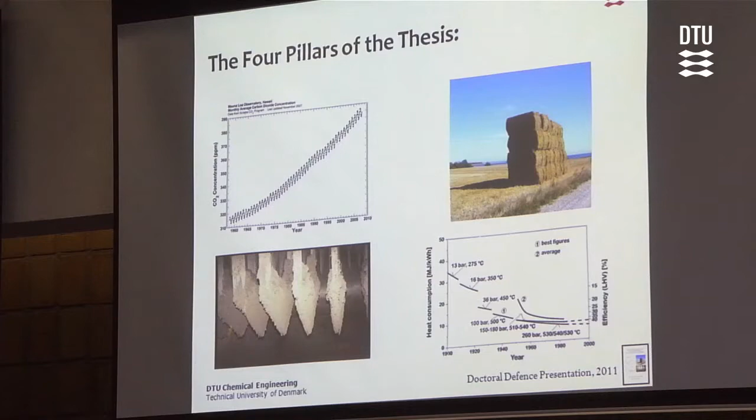We have to do something about that, so people have started firing biomass in this country, straw for the most part. The problem with the straw is that there is a risk of forming deposits on superheater tubes, and this will cause a low electrical efficiency, so we have to do something in order to solve that problem and increase the electrical efficiency of this.

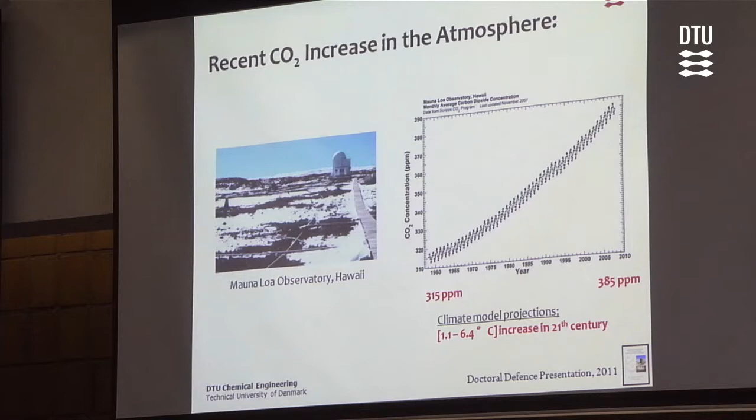As I said, the CO2 level in the atmosphere has increased over the last 50 years from about 315 ppm to 385 ppm. As a consequence of this, there are different numbers of climate models that predict an increase in the temperature somewhere between 1.1 and 6.4 degrees centigrade over the 21st century.

Now this has some consequences, one of them being that this beautiful creature will end up like this. We don't want that to happen for sure, but of course there are also other more serious problems with this. Rising sea levels, I mean, if you live in South Florida, you should be aware of this. There are potential problems with increase in the intensity of extreme weather events. We have probably already seen some of these things here.

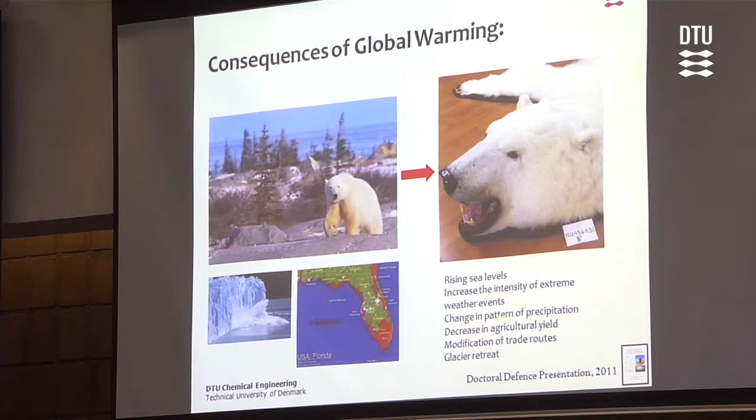There are probably some changes in the pattern of precipitation. There may be a decrease in the agricultural yield as a consequence of this. There may be modification of trade routes, and then we have seen already some significant glacier retreats going on. So we have to do something about this CO2 level in the atmosphere.

What can we do? If we look upon the carbon cycles of different fuels, over here we have the biomass. The time from the point where we emit a certain amount of CO2 from biomass combustion and until that CO2 is recaptured is in the order of years, maybe down to a single year.

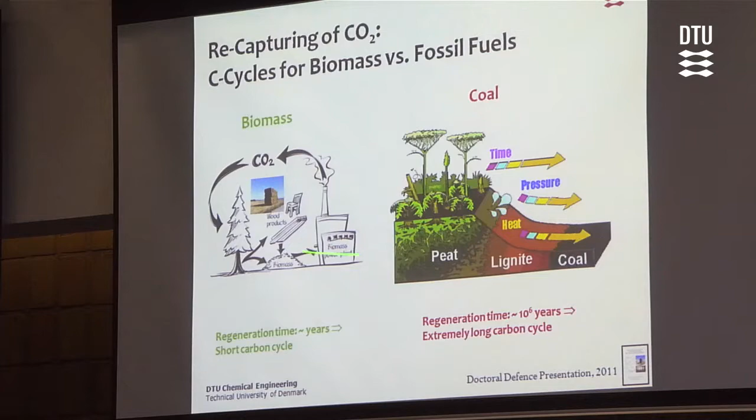If we take the same situation for coal, the time from the point where some plant material captures some CO2 and until you have a coal seam, this is done under the influence of pressure and heat over a very long time, up to millions of years. So the recapturing time and the regeneration time for coal is a lot longer than it is for biomass, and this is the reason why somebody came up with the idea that we can decrease the level of CO2 by burning biomass.

Everything comes at a price, thereby also the combustion of biomass. Here I have shown a Van Krevelen diagram which shows the content of hydrogen and oxygen versus carbon in different fuels. In here we have the old fuels, the fossil fuels. They have a low content of oxygen and hydrogen, but out here we have the biomasses. These fuels have a high content of oxygen and a high content of hydrogen.

Some of the oxygen is present as carboxylic acid groups, which have a counter ion, typically either potassium, sodium, calcium, or maybe even magnesium. And these counter ions have a tendency of leaving the system. They are released to the gas phase during combustion.

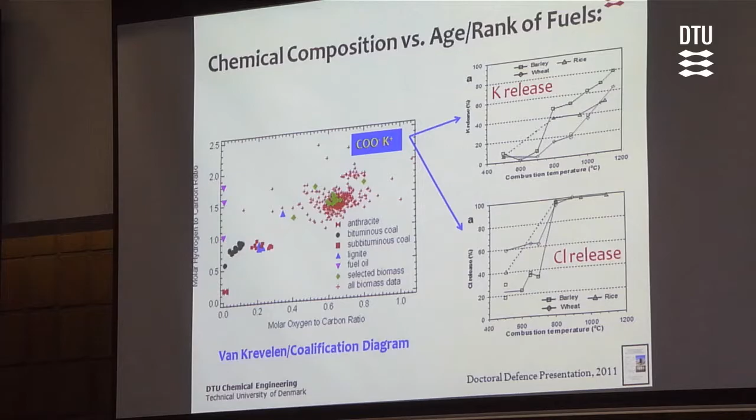In this case, you can see release profiles for a number of different annual biomasses for potassium, and you can see that at the highest temperature we have a release of somewhere between 60 to 80% of the potassium. For the chlorine, all the chlorine is basically leaving the fuel during combustion. So we have a bad cocktail here, a combination of potassium and chlorine.

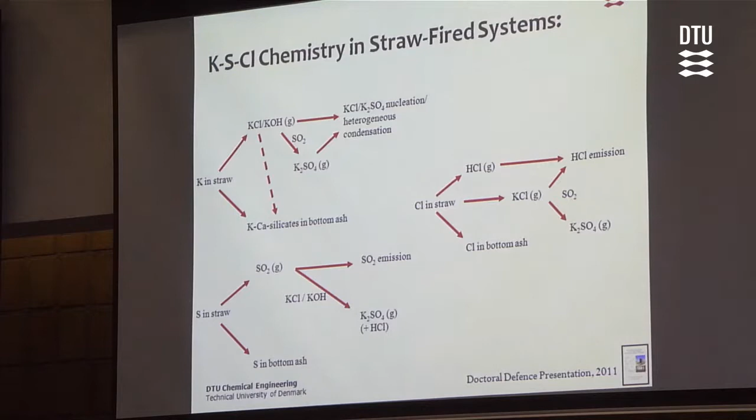There's a lot of chemistry going on in these systems when we burn the biomass. All kinds of interactions between potassium, chlorine, and sulfur leading to SO2 levels and HCl levels in the gas. And another important thing, formation of aerosols, small particles in the system. I'm sure we will have a discussion about this later on when we start the questioning part of this.

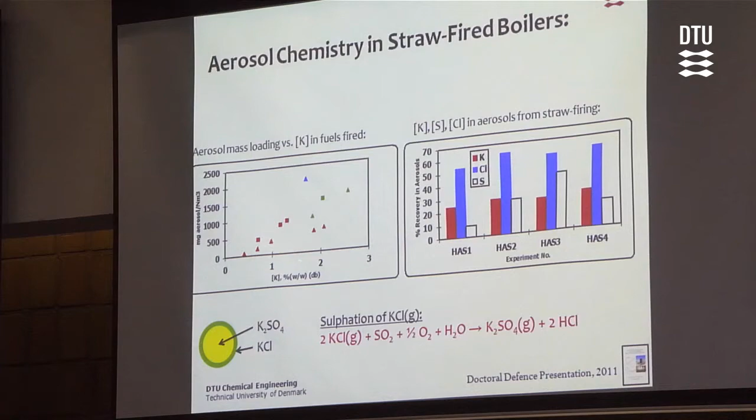Here is some data from one of the measuring campaigns where you can see the mass loading of aerosols in a flue gas versus the concentration of potassium in the ingoing fuel, the ingoing straw material, and you can see that there is kind of a straight line between those two. Somebody's picked up these aerosols and had them analyzed chemically, and you can see that a lot of the material in these aerosols is actually either potassium, chlorine, and sulfur.

Based on this, we had an aerosol technology group at the department some time ago that came up with this idea that the sulfation of KCl in the gas phase to potassium sulfate leads to formation of aerosols. And we will have a discussion about that later on also, I'm sure.

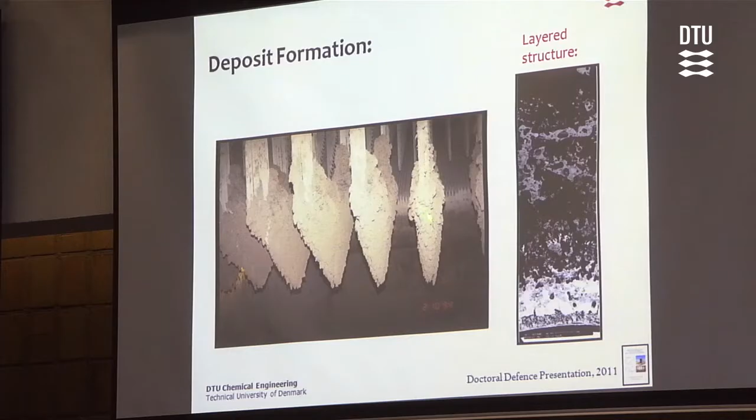The problem with the combination of potassium and chlorine is that it causes deposition in these boilers. And if you have a closer look at the structure of those deposits, you will see that in the inner layer you have a very high concentration of potassium chloride. This is a bad situation for the material that these tubes are made of. It can cause corrosion.

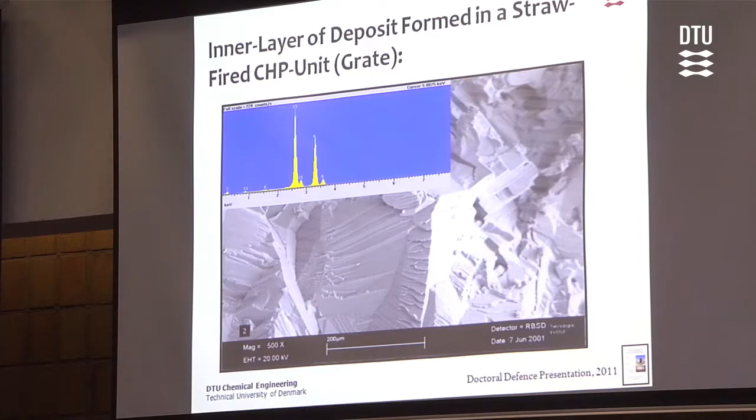I have another image here. This is an inner layer of one of the straw-fired plants we have here in Denmark. You see this inner layer, the only thing I find when I analyze it is potassium and chlorine. So we have analytically pure potassium chloride in the inner layer. What happens if you have an inner layer sitting on a tube which is rich in potassium chloride? Well, there's a risk of having a reaction with SO2 from the gas.

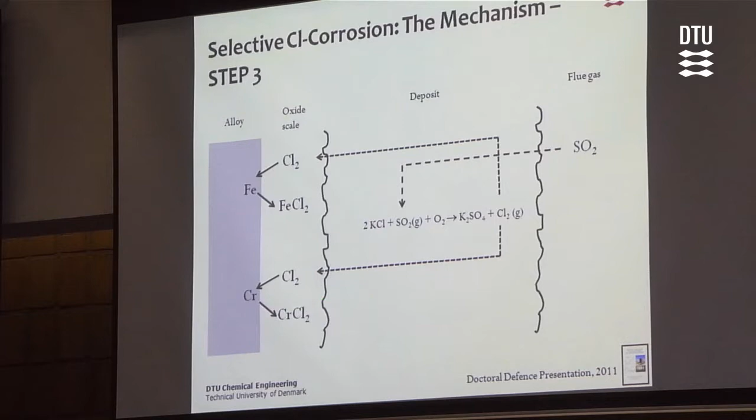This reaction may cause release of chlorine gas, which may penetrate through the oxide scale and react with either chromium or iron in the alloy material. This will form volatile chromium chloride or iron chloride, which will then move out through the oxide scale till it reaches an atmosphere with oxidizing conditions and be reoxidized to chromium oxide or iron oxide. So the presence of chlorine close to these superheater tubes causes some kind of an extraction of chromium and iron from these systems.

What can we do about this? There are a number of different means we can apply in order to minimize this effect. One of them is to apply an additive, and we've been working on that for a while actually in connection to this. In principle, we have two different types of additives. The first one here, the basic idea is that you inject an additive and you have some kind of unwanted compound removed from the gas by a chemical reaction on the surface.

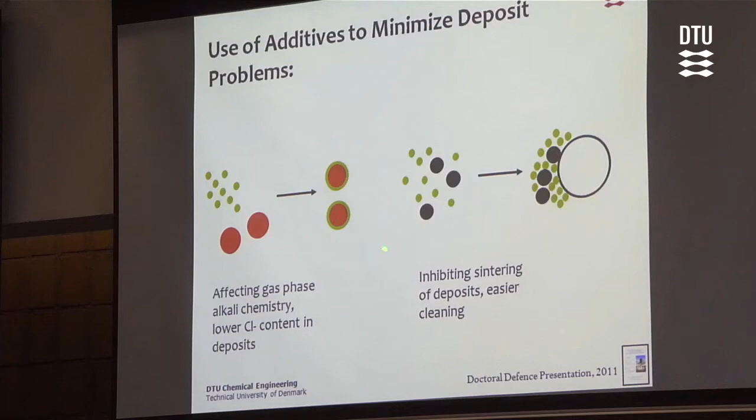The other type of additive, the black guys here, the idea is that you have them actually sit in the same spot as the rest of the material that is deposited on the tubes, but these cause inhibition of the sintering, which means that it's fairly easy to blow this off the tube. So we have in principle two different types of additives that we can apply. We have been working mostly with this one, where we have an interaction between some gas component transforming an unwanted gas component into something which is harmless in the system.

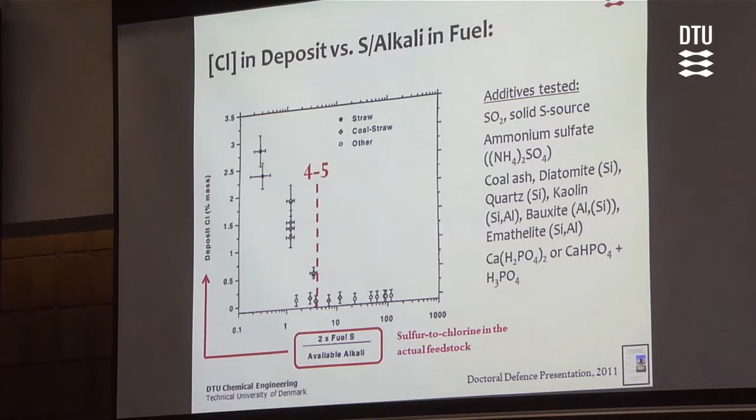Actually, if you look at the sulfur to chlorine ratio in the fuel, it's very important for the total amount of chlorine in the deposits. So if you have a high sulfur to chlorine ratio in the fuel, you have a low chlorine level in the deposits. So actually by adding some kind of a sulfur-based additive, you should be able to ensure a low concentration of chlorine in your deposits.

We tested some of these same additives as was tested in this full-scale plant in our entrained flow reactor, and saw that there's also an effect on the chlorine level in the deposits, at least when we see them in the entrained flow reactor. There's a lot of interesting chemistry going on with these additives, depending upon what type of additive we have. Is it aluminum silicon based? Is it phosphor based? Or is it sulfur based?

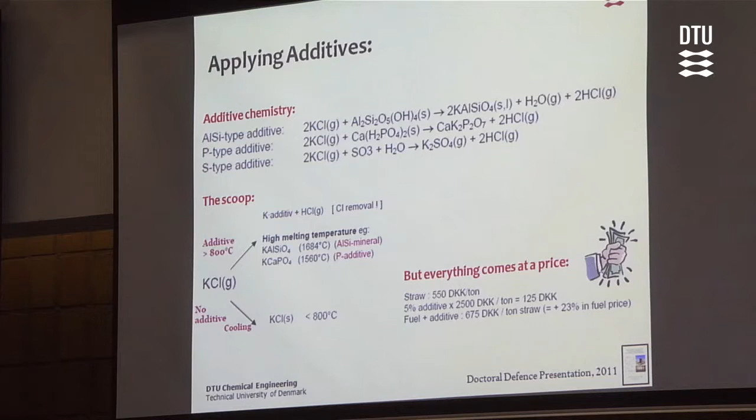The basic idea and the ideal additive would be one that removes an unwanted compound and transforms it into some high melting species that will not cause deposition. And then we have, for example, chlorine released as a lesser harmful species than was originally present in the system. But again, everything comes at a price, and adding an additive into the system can cost money, something you have to be aware of.

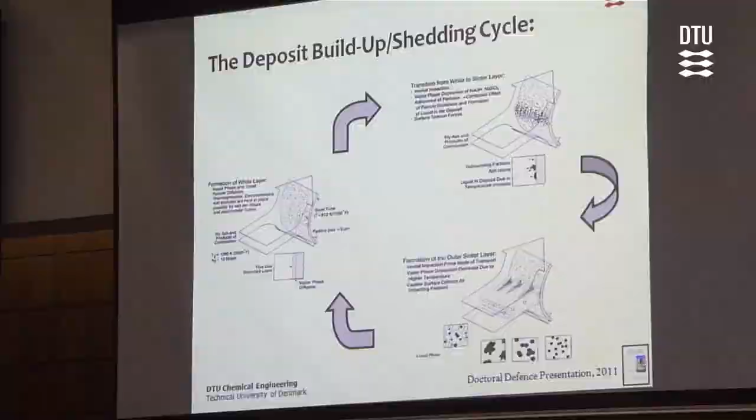Another angle of this work is the shedding work. We have been doing quite a lot of work on shedding actually. Shedding is the falling off of the pieces of deposits from a tube. If you look upon the deposition process, it's a cyclic process, meaning that first you build up a thin layer of something which makes the tube sticky. Then you have deposit of somewhat thicker layers of somewhat bigger particles.

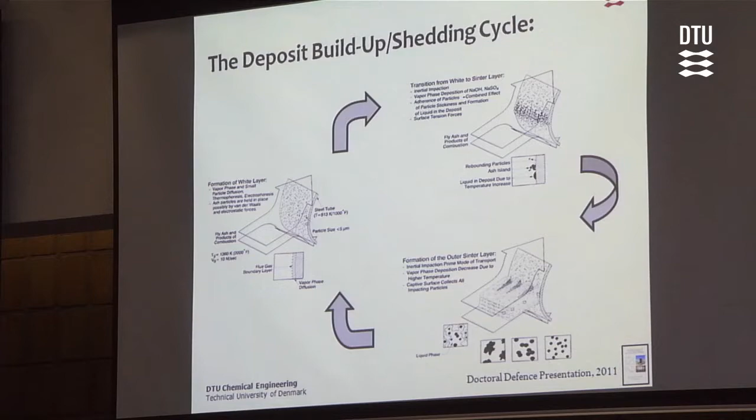And then at a certain point, you have an accelerated growth of deposits because the tube is getting wet on the surface and it becomes easier to retain the particles upon impact. So it's a cyclic process, which means that from time to time, you have some of the deposit that has built up on these tubes fall off. And then you build up a new layer.

So we started out by making a huge review of the literature where we collected all the available information. And then we developed a specially designed probe, where we are able to quantify the amount of deposit and the heat uptake at the same time, basically. So we can quantify how much heat is actually taken up and how much deposit is actually built up on this probe. We have tested the probe at Avedøre power station where we plugged it in and did some measurements, and you can see some of the raw data here.

You see the temperature profile, that's the gray one, and you see the mass of deposits being built up on the probe. You see it increases up to a certain point, then we have something fall off the probe, and we have a new build-up, and a fall off and a new build-up. This is raw data; if you average them over certain time periods, you can get signals like this, and you can then start analyzing how long is the deposition and how long is the shedding time for that actual system and that actual fuel.

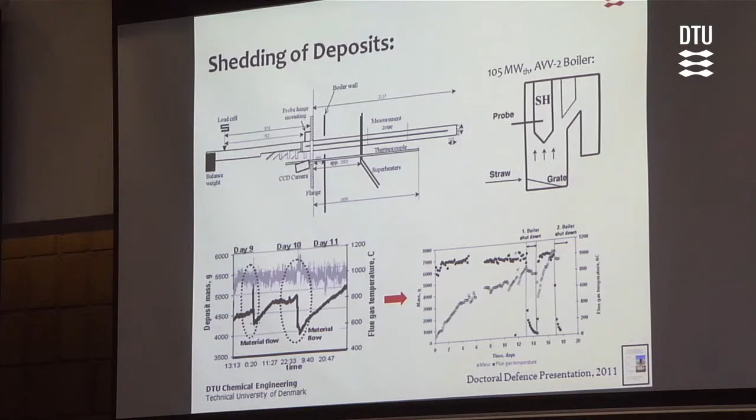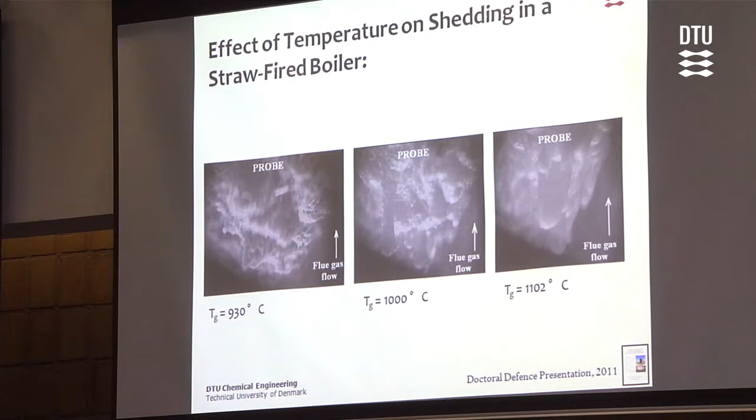Here is an example just to show you some images of what's going on there. Here you see the effect of the temperature on shedding in this system. We are looking in on a probe which is placed in the flue gas channel, and we are looking from below up against the south side of the probe. You see that at 930 we have an almost dry surface on the south side, which is coming in contact with the gas here. But if we increase the temperature, we start building up these droplets, and at 1100 we have seriously formed big droplets which are literally dripping off the probe. And this is what is happening.

Most of what I've been saying until now has been dealing with straw-fired systems. We have done a number of full-scale measuring campaigns of some of the straw-fired systems: Haslev, for example, Rudkøbing is another one, Masnedø power station, and Maribo-Sakskøbing. We have also been there doing measurements of different kinds. We have done two types of measurements, basically.

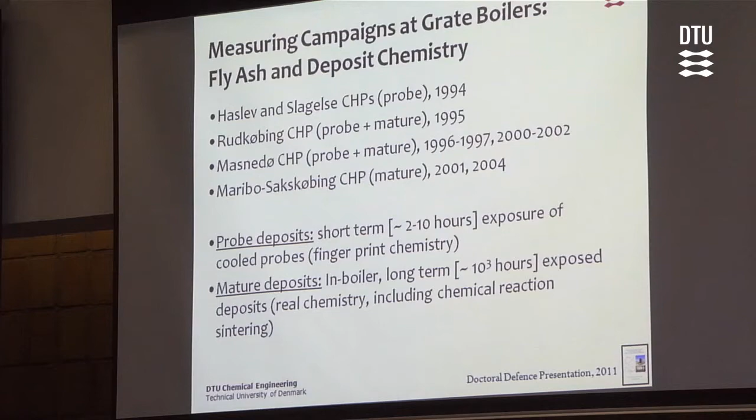Probe deposits, which is typically a cold finger that you stick into the flue gas channel. These probes have a very short exposure time, and it's sort of a fingerprint chemistry you get out of these probes. You get an immediate feeling of what is going on chemically in the boiler. We've also been analyzing mature deposits, in-boiler deposits, which have been taken out from tubes inside the boiler. And these deposits have typically been sitting for thousands of hours, so they have a more mature chemistry.

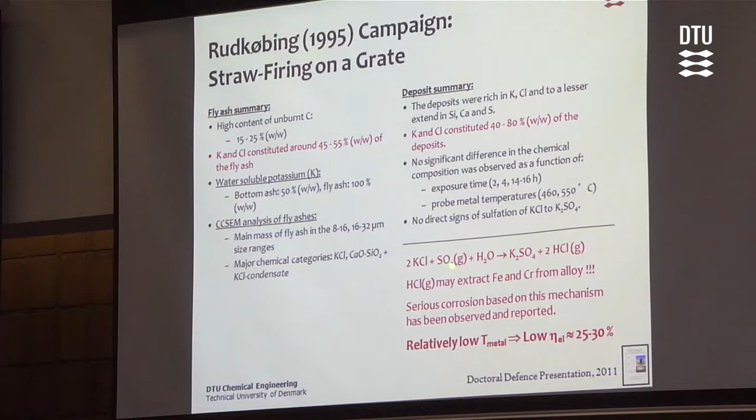One of the examples is the Rudkøbing power station, and the conclusion, if we look upon the fly ash chemistry: lots of potassium, lots of chlorine, and the same story goes for the deposit chemistry. The problem with the potassium and chlorine going together is that you may have this reaction with SO2 from the gas forming potassium sulfate and then releasing some chlorine gas close to the tube. And for that purpose, you have to keep the temperature fairly low in these plants in order to avoid serious corrosion. Therefore, you get a low electrical efficiency in these plants.

Somebody came up with a good idea here now. If we look upon the electrical efficiency of other types of plants, coal-fired plants, for example, you see that over the years, the electrical efficiency has improved significantly. And for some of the coal-fired plants, we are at electrical efficiencies of, say, 46 to 48%. So if we are able to sneak in a little amount of straw into these systems, we get a much more efficient transformation of the straw. And that is the basic idea.

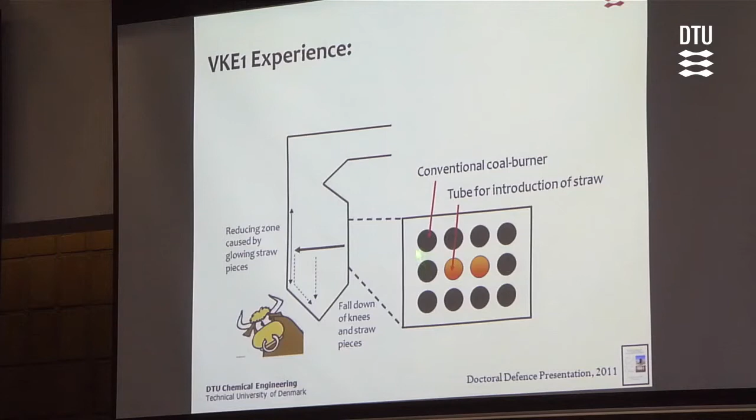So let me say a few words about the wonders of co-firing. This is an exciting world. First case was the Vestkraft power station in Esbjerg, where they blew in the straw in 2 tubes in the middle of the burner gallery. So those 2 tubes were surrounded by coal-fired burners. And I believe that they saw at least one negative consequence, which is that the straw was blown directly across the furnace and burned up all along the wall here. Or there was a drop of knees from the straw structure, which burned out in the hopper of the system. So it kind of indicated that you can burn straw, but it's not a very efficient way of doing it like this.

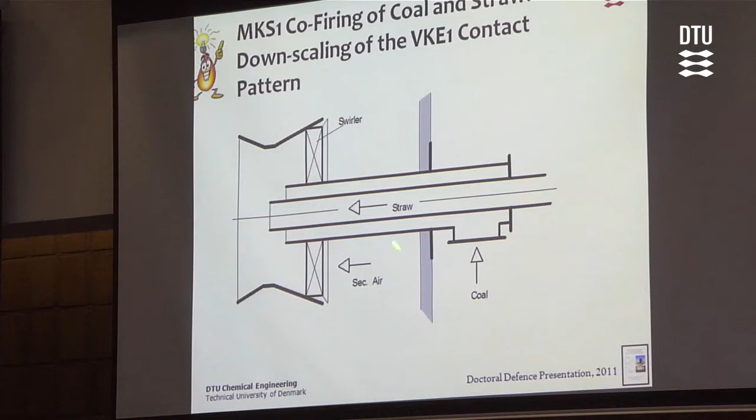But then somebody came up with this idea, let's downscale this system to a single burner instead of an entire burner gallery. So the next good idea, we now introduce the straw in the middle of a burner and have a swirling coal flame surrounding the straw, which gives you a very tight contact between the coal ash and the straw, which is releasing potassium and chlorine. The good story here and the big chemical scoop of co-firing is the fact that you take care of most of the potassium from the straw ash by use of the coal ash. The coal ash is, so to say, working as a sort of an additive here, taking care of most of the potassium, while most of the chlorine is leaving as HCl, which is harmless compared to the other situation.

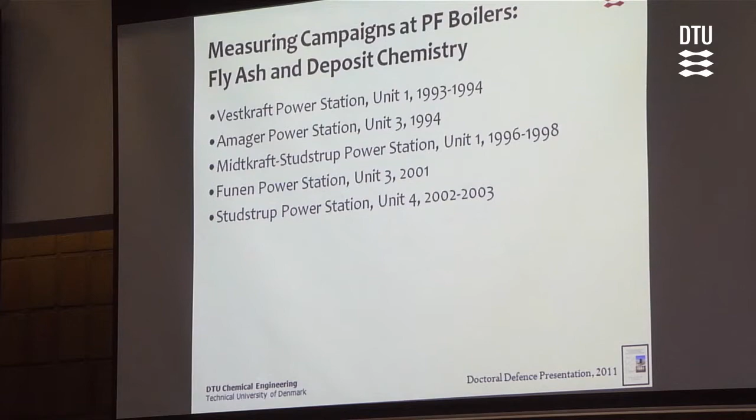We've also been involved in a number of full-scale measuring campaigns on coal-fired systems over the years. One of them, a classical one, is the Studstrup power station in Midtjylland. Here we plugged in probes all the way from the top of the furnace down through the convective section of the boiler. We applied different metal surface temperatures and different exposure times, all the way from 15 minutes up to about 72 hours for some of them, to see if there's an effect also of the exposure time.

The conclusion, and there's an outline in the thesis and there are a lot of papers behind that work, the conclusion, I believe, is that coal quality is pretty important. If you fire coal with a high quality, as is usually the case in the Dong area, you should be able to do this. You should be able to transform those 20% straw without any problems. But, and there's a big but here, if you take some low rank coal into account here, then you may have a problem.

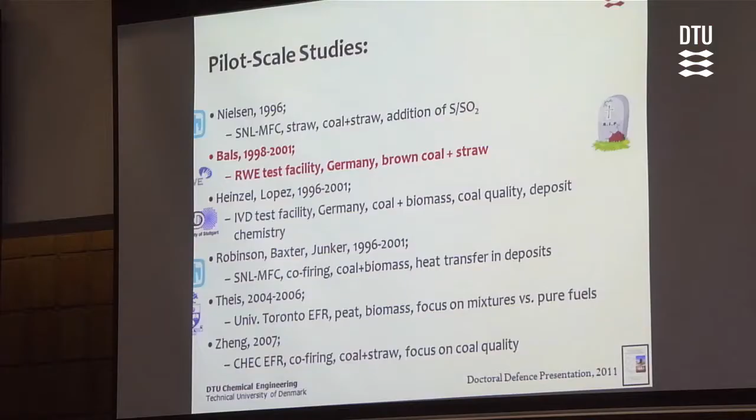We were lucky enough to enter an EU funded project a couple of years after the Studstrup power station campaign, and some of the German participants in that campaign offered to fire a pretty nasty combination of brown coal, which is a low rank coal, with a Danish straw with a high content of chlorine and a high content of potassium in the RWE test facility in Germany.

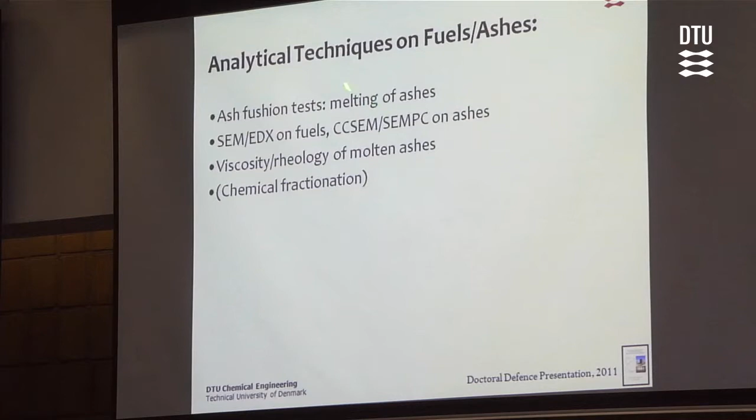And the conclusion of the campaign we did down there at the RWE test facility is that you should not combine low quality coal with straw. Beware of that. We have also been involved in developing analytical work. There are a number of places where we have done some significant contributions here. Ash fusion test, for example, the melting of ashes. I'll show you that in just a second.

We have contributed to the SEM-EDX analysis, or rather to the CC-SEM analysis of ashes. We have done a lot of viscosity work, actually. It's not mentioned in the thesis here. And then we have helped gaining results that can be used to test chemical fractionation in other places.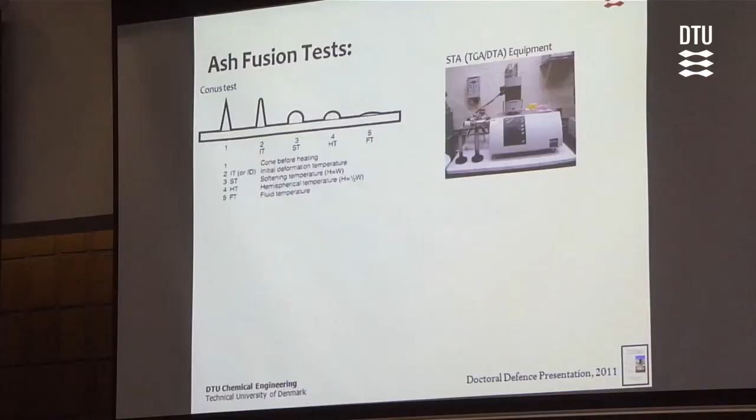60 degrees is not even the worst case. We have some other cases where we found differences of up to about 300 degrees centigrade between the point of formation of the first little amount of liquid in the STA compared to the conus test. So that's an example of some of the work we have done on the ash melting and quantification stuff. We have also been contributing to the CC-SEM and SEM-PC work.

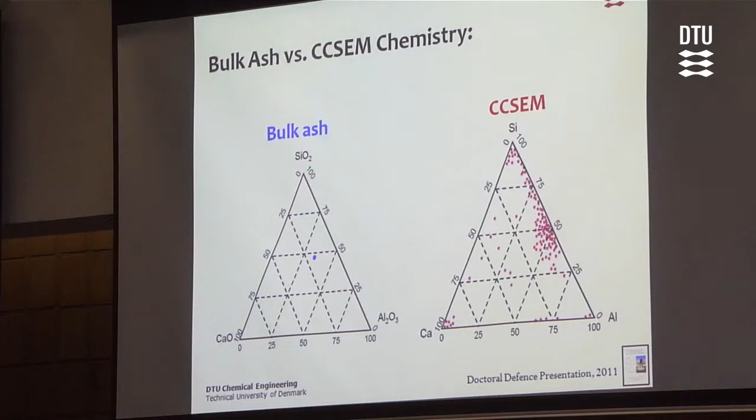Way back in the 80s in America, they came up with this idea that we could do CC-SEM analysis on this. In the CC-SEM analysis, you get a particle-to-particle analysis, which means that each and every one of the single particles have their own chemistry. From a modeling point of view and from an understanding point of view, this one makes life a lot easier than the bulk ash chemistry. The problem with this method is that it was developed in America a long time ago for coal-derived ashes. And we had this purpose of doing studies on ashes derived from straw, for example. So we made a development.

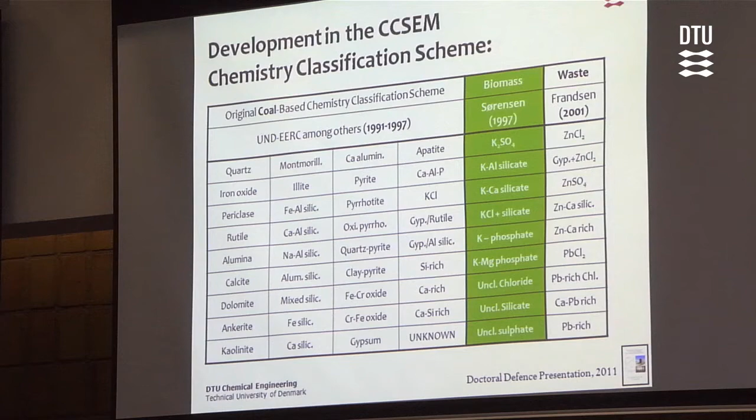The basic idea first. The basic idea is that you bombard a sample and you have different backscatter electrons and secondary electrons coming out of that, and you have an X-ray signal that you can use to analyze for the chemistry and the surface structure of the sample. But we made a development of the original coal chemical classification, which is shown here, and added the green one here, so that we are now able to do these types of analysis also for biomass-derived ashes. After that work, we have also done it for waste-derived ashes. And we are now in a process where we are trying to do the same thing for cement products.

The last point I'm going to mention here before I wrap all this stuff up with a quick summary is that we have also set up an ash course, which is fairly important because it allows us to make training of new people coming into the system, and it allows us to accumulate information. Every time one of our students comes with something interesting, I accumulate it in the ash course material, and as you can see, we cover all the interesting aspects going on there.

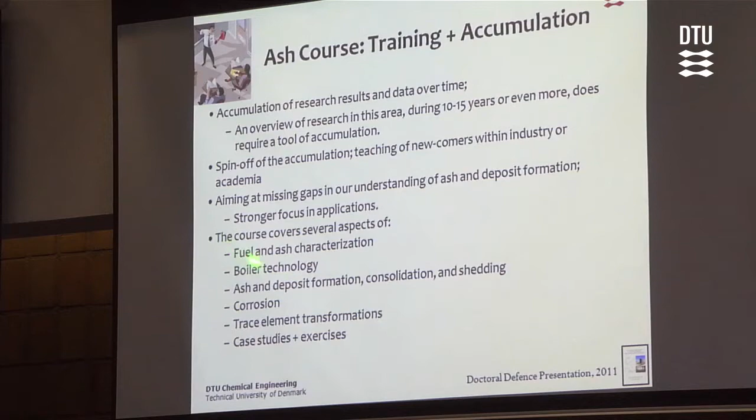We have fuel and ash characterization, we have boiler technology aspects, we have ash and deposit formation, sintering, shedding, we have corrosion aspects, we have trace element chemistry going on. So it's a very efficient way of accumulating information and making sure that we can at all times give a quick introduction to new people coming into the system, not only at our university, but also among some of the industries that we work together with.

Let me make a wrap up of what we have obtained here now. What is it that we have achieved with this work and that I have described in the thesis here? Well, we have now a documentation for the research activities on different things. Straw firing. We have done a lot of release studies trying to quantify how much potassium, how much sulfur, how much chlorine is released from the straw as a function of time and other parameters.

We have done some lab scale exposure of test elements to corrosive gases and analyzed them together with people from our good friends at DTU Mechanical Engineering. We have done a lot of probe measurements. We have done additive studies, both in our entrained flow reactor, but also in big real life. And we have done shedding studies.

We have also been involved in the coal-straw co-firing. We have done probe measurements. We have done a study on the effect of coal quality in pilot scale. We have developed, as I showed you, two examples of some analytical techniques like the ash melting and the CCSEM classification scheme. And I believe that we are ready now to take on the next step, which will be pure biomass firing in suspension.

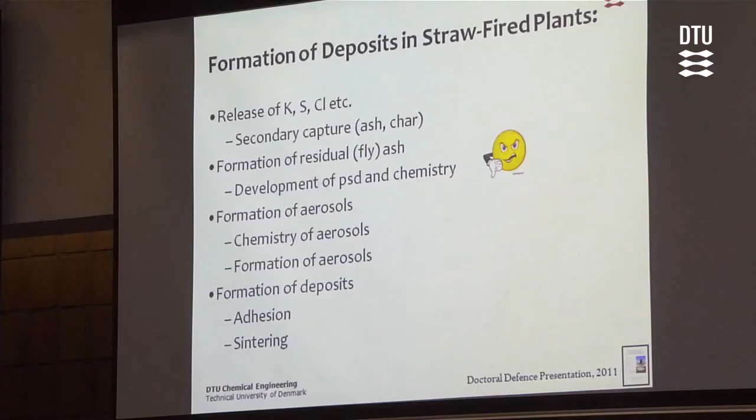If we look upon the understanding of the whole process of something coming into a furnace and then causing a deposit somewhere in the system, I believe that we are doing pretty well on most of it. There is a bit of a gap in the way we understand the formation of fly ash in straw-fired systems. There we have to do some supplementary work if we want to understand that fully, especially addressing the particle size development and the chemistry of the fly ash particles.

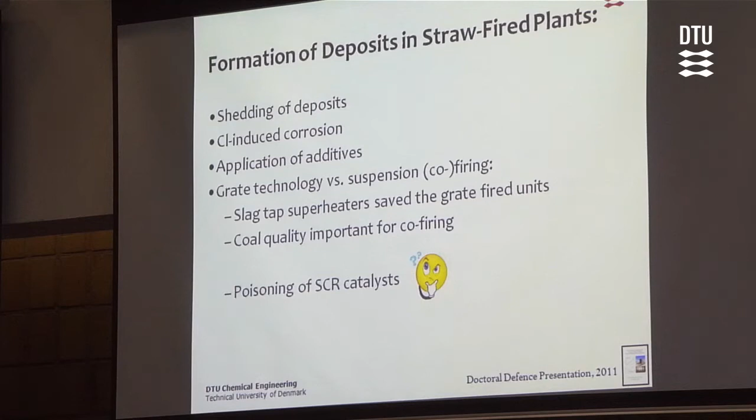We are also doing pretty well on the shedding, at least on the cylindrical probes. We have done a lot of work in close cooperation with the industry on corrosion activities. We have studied additives. We have still people working on the probable poisoning of SCR catalysts in coal-fired systems. And that's about it.